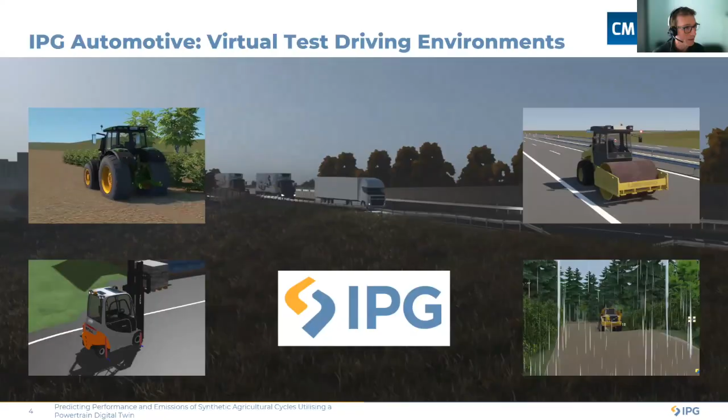So the background to the project: what we wanted to do was to take an existing digital toolchain, one that was developed by HORIBA Intelligent. The methodology of this toolchain is to create an empirical digital twin. So what essentially happens is you take an engine in a test bed, you create a digital model, a digital representation of that engine. You then take it into a virtual environment and you test it against representative load cases

from that virtual environment. Because this is the case, there's no limit to the number of variables that you can explore. And this means that you can test not just one or two representative load cases, but an enormous number of sample test cases. And the concept is that with this approach, those engineering teams are able to test a very large number, identify those hotspots, those load steps, those test cases in which the engine is going to produce a very high emission state.

The concept then is, having identified these hotspots, as we call them, you return to the test bed, you run the tests in the test bed, confirm that your predictions are correct, and then you move forward and develop your way to a solution. So that's a proven approach with respect to on-highway applications.

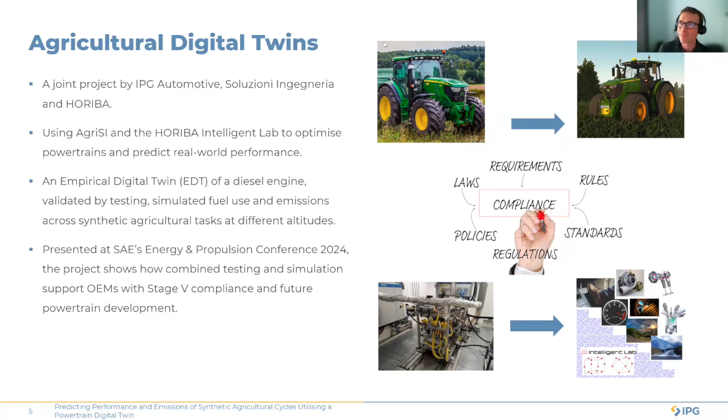I work in Soluzioni Ingegneria, an Italian company that is partner of IPG Automotive. Today we go directly to the same presentation we did in SAE last year, the prediction of performances and emissions for synthetic agricultural cycles utilizing a powertrain empirical digital twin. So just an introduction, you will have two halves of this presentation. One belongs to AgriSI, our side.

It is a software able to simulate vehicle dynamics during off-highway operations. And we worked together with MIRA to exploit AgriSI to obtain reliable data to feed the HORIBA MIRA powertrain model to evaluate fuel consumption and emissions. So I will take this first part, exploiting the simulations in precise agricultural scenarios and providing engine speed and engine torque to MIRA.

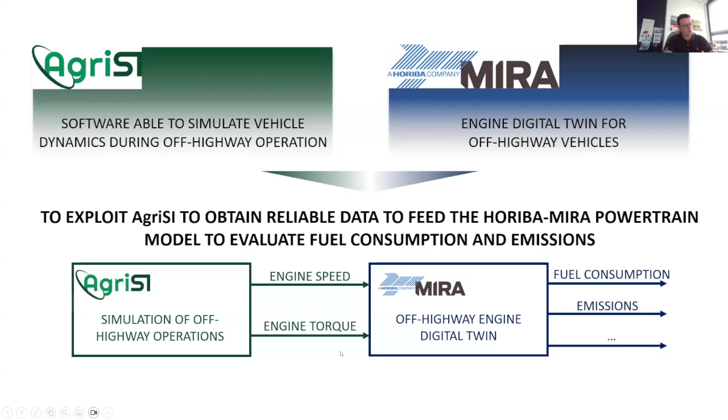Agricultural vehicle dynamics and precision farming simulation platforms, co-simulation with IPG CarMaker and TruckMaker. So I will pass in my index through what AgriSI is, some main features of AgriSI for a better understanding of the capabilities, and data extraction for the digital twin of the engine. So when we work with the tractor and implements, starting from the implements, in our software we model mass, inertia, geometry, suspensions, tire over plastic soils, operating limits, movement, kinematics in case the implements make some transformation during operations.

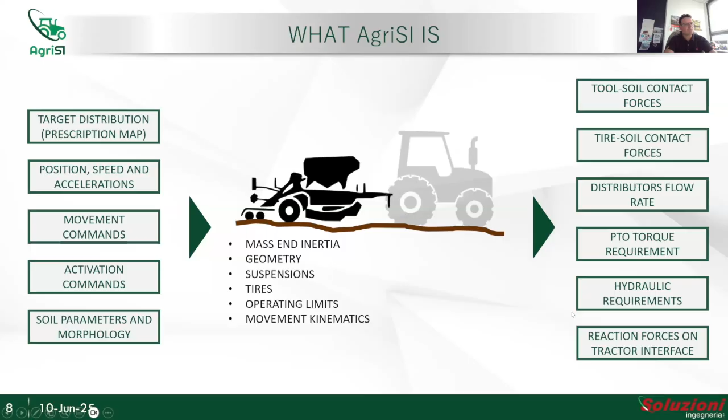So to feed the implement model, we can use a prescription map, that means the target distributions or operations, georeferenced, position, speed, accelerations, movement commands, activation commands, and soil parameters and morphology. The implements model will provide tool-soil contact forces, tire-soil contact forces, distribution flow rate, PTO torque demand, hydraulic requirements, reaction forces on tractor interface.

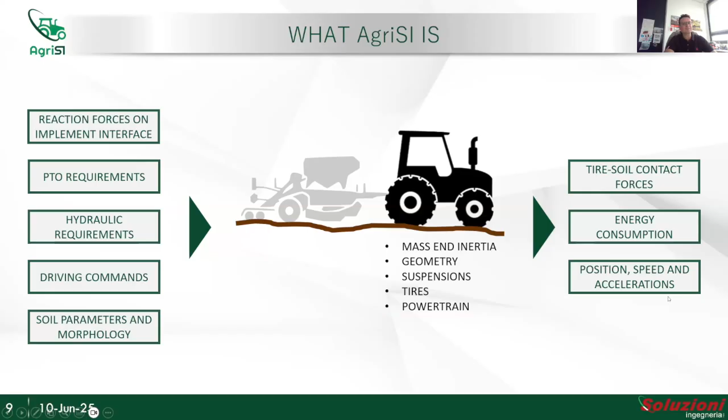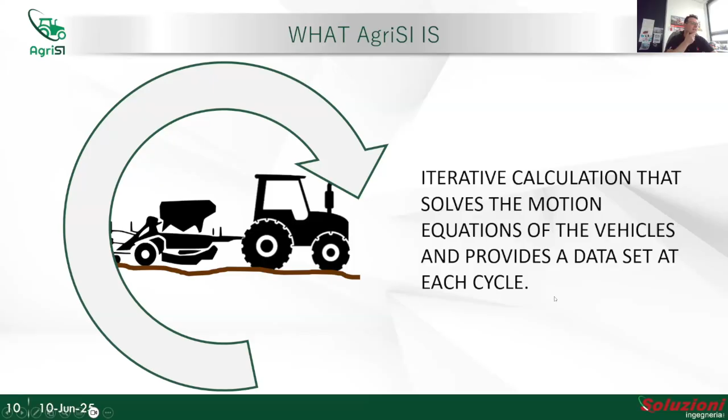So as we reach the tractor, again, we can fully parameterize mass, inertia, geometry, suspensions, tire, powertrain. The tractor will handle reaction forces on implement interfaces, PTO demands, hydraulic requirements, driving commands, soil parameters and morphology, and results in tire-soil contact forces, energy consumption, position, speed, and acceleration. So this flows in an iterative calculation that solves the motion equations of the vehicles and provides a data set at each cycle. So let's see a little bit more in detail.

So when speaking about the tractor, we can build a tractor model starting from experimental or multi-body models if already existing, for example, MSC Adams, through a converter that is quite rapid in developing real-time models. The powertrain can be either ICE or electric and hybrid with dedicated gearbox and driveline models. Simulations of dangerous and critical maneuvers, for example, overturning. I would also say in-field without accounting for seasons, so we have the possibility to simulate every period of the year. Tire model calibration accounting for plastic soil.

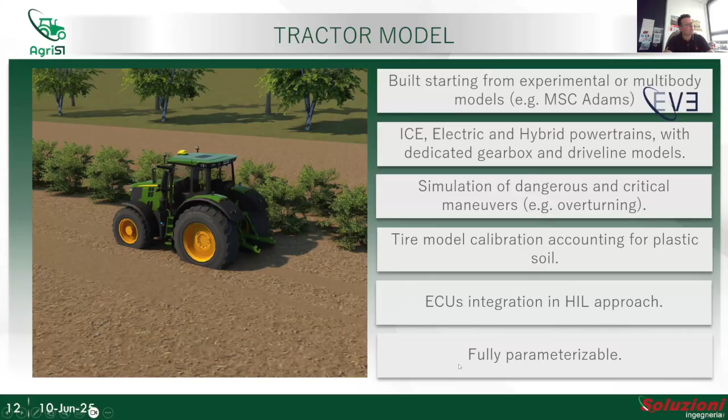And, as Stephen said before, when we arrive to have some hardware already available, we can jump to a hardware-in-the-loop approach. That means having some real components, real ECUs integrated in the loop of simulations. All the architecture is fully parameterizable. You see just an example for on-road scenarios where we see a tractor with a trailer in the back where the payload can be changed accordingly.

Speaking about tire and plastic soils, these are quite relevant to the scope, and the tire model has been built starting from experimental data, through which we instrumented full tractors with dyno hubs, having longitudinal and lateral tire slip and force and moment in the wheel hub. Out of the observation of the experimental results, we were able to fit the numerical model in order to respect the experimental evidence.

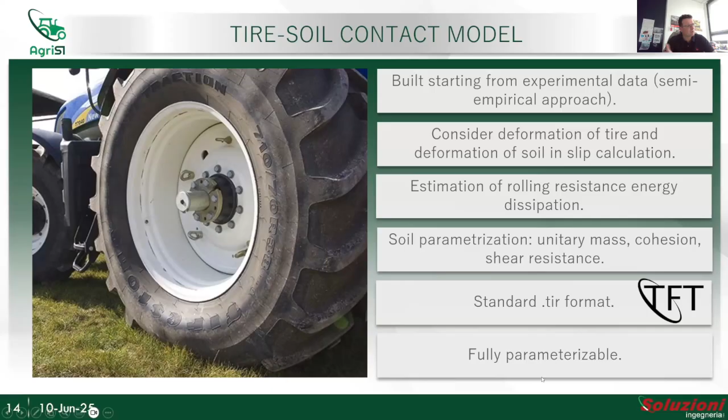This also, of course, considers the deformation of tire and soil in slip calculation and rolling resistances for power loss and energy dissipation. The soil parameterization comes through unitary mass, cohesion properties, and shear resistance. At the end, all this information is used to populate the standard TIR format because we want to guarantee the real-time capability of the software platform. Again, the tire can be fully parameterized according to tire geometry and soil properties.

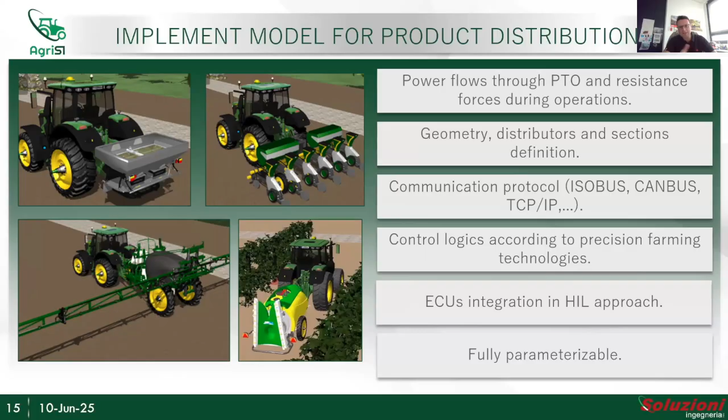When reaching the implements, we have all the power flow through the power takeoff and resistance forces during operations. For example, for the seeding machines, all the resultant reactions under the blades, or thinking about soil tillage, as we will see shortly. The communication protocol between implements and tractor includes most of the standards: ISOBUS, CAN bus, or TCP/IP. Control logic of the implements according to precision farming technologies. Again, when the implement is ready, at least with some of the hardware, we can place the full hardware in the loop and feed the I/O of the implements through real-time simulations.

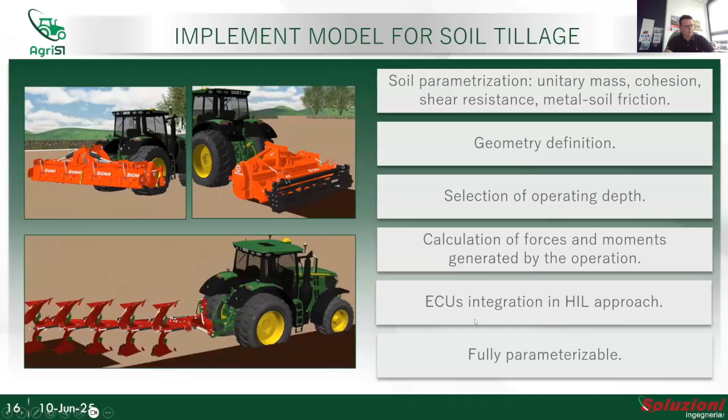Before we mentioned soil tillage, so you saw before seeders, sprayers, fertilizers, but we also have soil tillage machines. So again, we have the possibility to implement soil parameterization with all the connection to soil, geometry definition, selection of operational depth, calculation of the forces and moments generated during the operation, and the possibility to run HIL.

In this video, you see the plow at different depths generating resistance forces on the tractor. The plow itself can be lifted up, and all the inertia of the implement is taken into account during simulations, according to the final position of the implement. So you see the huge pitch inertia given by the plow.

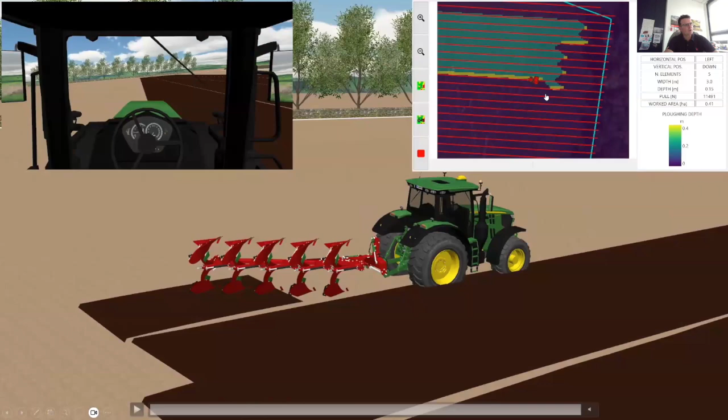The same can be reconfigured on each side, so we can flip the implement side by side and restart the operation. There is also soil manipulation, such as the furrow given by the previous passages. As soon as the blades operate, we monitor what's going on in terms of where we are, the trajectory we are following, the previous furrow, if it is filled, and the new furrow carried.

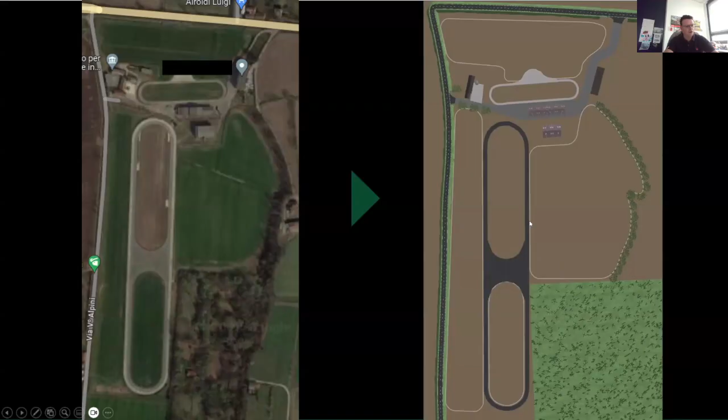Scenario: we need a georeferenced scenario. We can import any field in the world, starting from a shape file with the field boundaries, real shape and morphology, with the possibility to add edge situations such as environmental situations or obstacles, vulnerable presences in the field such as animals or operators, customize and perform beautifications, and try to achieve at the very end the digital twin of a farm with buildings, different farms, fields with different soil properties, etc.

Control logics, GPS-based, meaning georeferenced within the field. This means we needed to simulate the georeferencing of the tractor within the field with latitude and longitude, prescription map importing, and product distribution control. So where the tractor is, it needs to know the target flow rate that has to be accomplished in that section. Optimal trajectory importing and generation algorithms, GPS-based longitudinal and lateral vehicle control, the CEP for GPS noise injection, and again, as soon as ready, run HIL of any of the components.

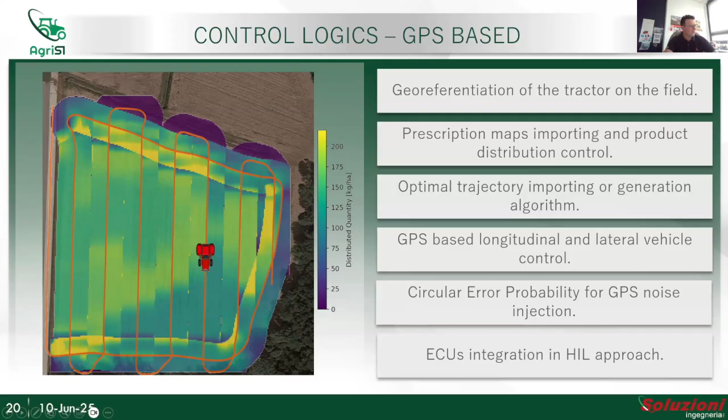You see an example of a real field. This is a typical prescription map giving the kilograms per hectare in the different sections of the field. The tractor is running over a given trajectory. Thanks to GPS, it knows where it is, and we just covered the green zones, and previously a yellow one.

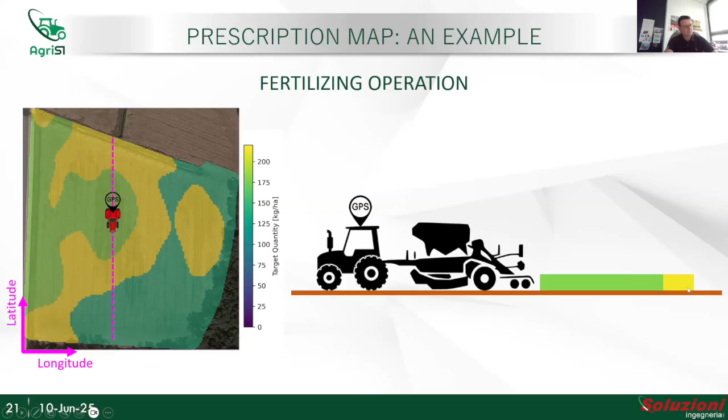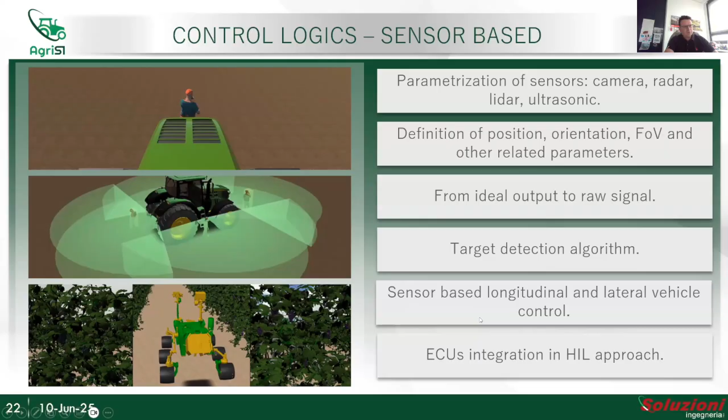Again, control logics can also be sensor-based with some sensor fusion, because, for example, we need to look at the surroundings occupied by a vulnerable user, or better understand orchard or vineyard plants, whatever. So camera, radar, LiDAR, ultrasonic, definition of position, orientation, field of view, and other related parameters, from ideal outputs to raw signals, target detection algorithms, sensor-based longitudinal and lateral vehicle control for slip analysis, and again, HIL.

So let's see some data extraction that has been done for MIRA. The target was to achieve engine and torque demands, and we ran over different scenarios, for example, fertilizing, comparing soft and compact soil, spraying, flat and hill, plow, effect of depth, seeding with PTO and soil tillage, crop transportation also on public road. I won't go all along the matrices, but just to see a few examples for the fertilizing, understanding the differences between compact and soft soil.

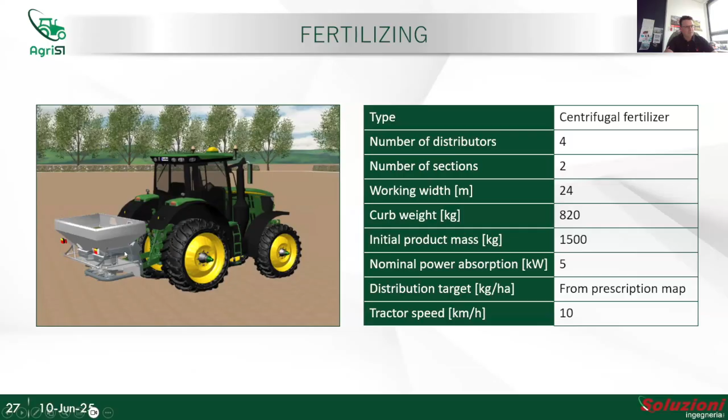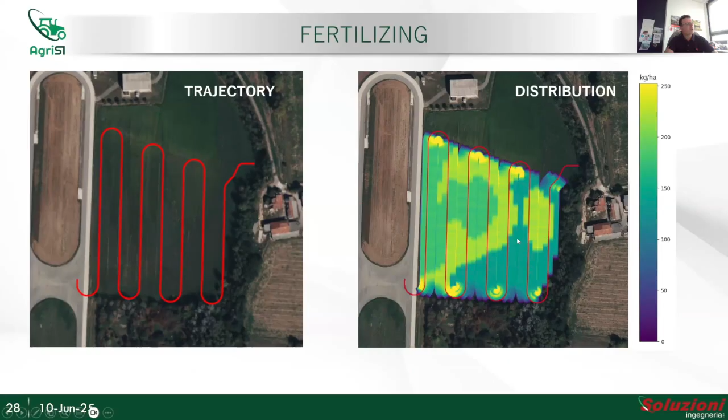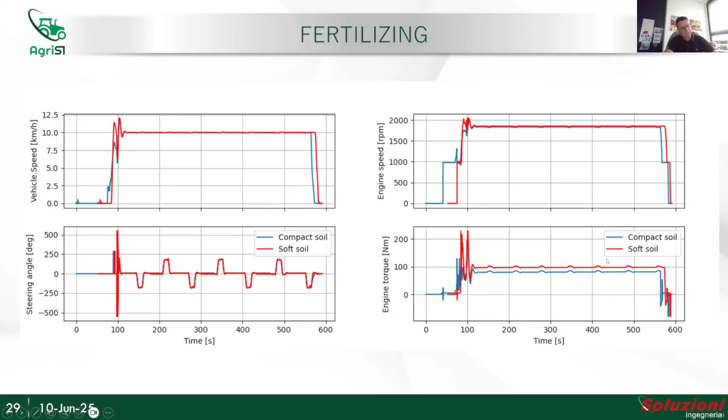The fertilizing is demanding PTO mostly, so this is the convoy, tractor, and lumped suspended fertilizer with some parameters on the side. And out of a trajectory, we were interested to accomplish a mission of prescriptions. So this is the results of what has been done. And the comparison by means of time histories: vehicle speed that is mostly the same, with the blue compact soil and the red soft soil. The steering angle also is mostly maintained the same, RPM of the engine, that is the target of the controller. But at the very end, you see finally some differences in terms of engine torque demand, Newton meter, over compact and soft soil. Those will be the inputs to MIRA.

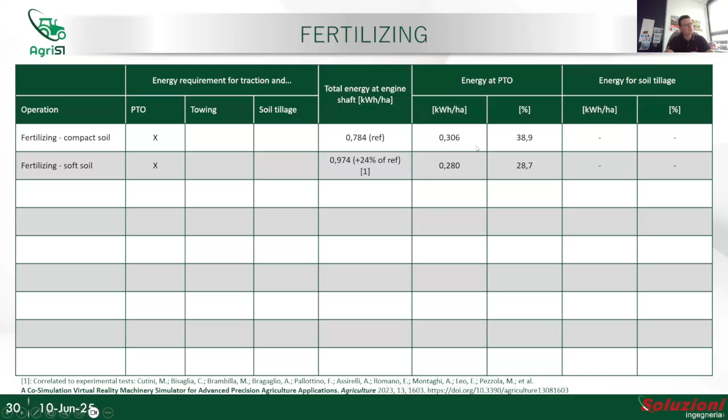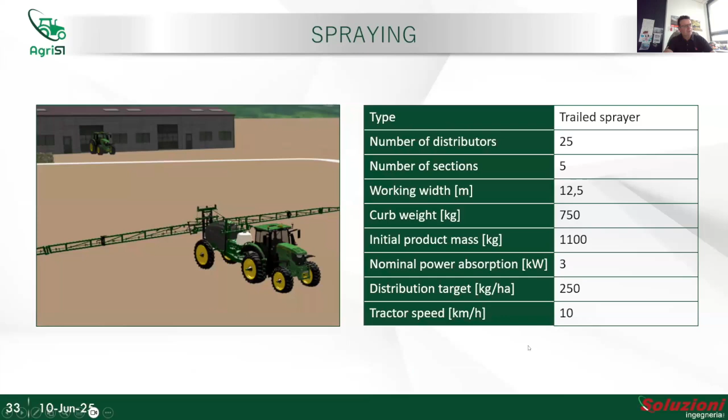So here, briefly, with some good references published on agriculture, you can see what the energy per hectare was, total energy, and the split between PTO demands for the fertilizing operations and the percentage over the overall energy. So spraying, I would see the second example with flat and hill. The spraying is also making some towing, that means there is a semi-trailer in addition to the PTO. This is what we are observing, and the corresponding parameters on the side. Now we are working with constant rate over all the field.

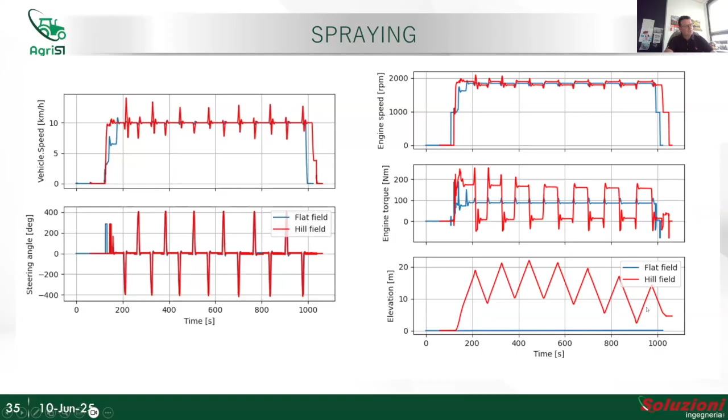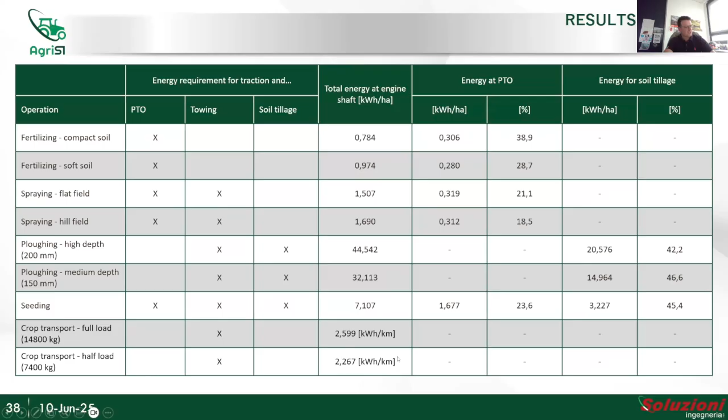And again, we can observe time histories by differences. Again, same speed, same steering angle, same engine speed, but now we have different engine torque, because of the demands when running uphill or downhill accordingly. You see the elevation in the very bottom. Again, final energy normalized over work surfaces, and the corresponding percentage. We will go through all, and at the very end, we have just a map that is just numbers at the moment, but you can have, I guess, the presentation to better have a look inside in terms of all the operations done, also the plow that is very demanding, and the road expressed in kilowatt hour per kilometer run.

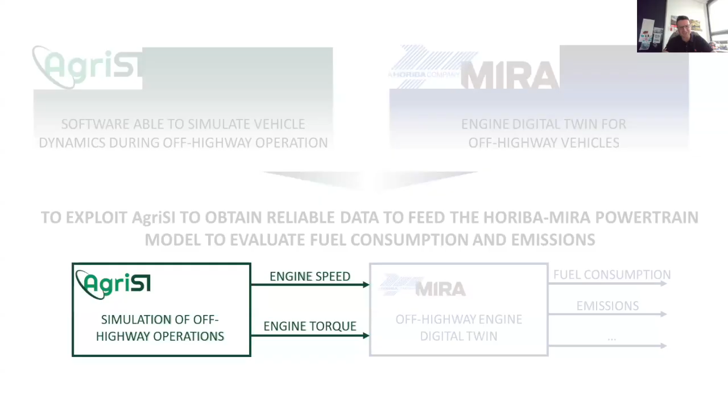Thank you. Okay, so yeah, my name's Steve Whelan. I lead a global application center here at HORIBA MIRA for HORIBA, our parent company. For those of you who don't know, HORIBA is a multinational Japanese company making measurement instruments, specializing in accurate measurement of all sorts of things. My association with it for most of my career has been measuring vehicle emissions and engine emissions. And at MIRA, we've been developing vehicles and powertrain since 1948. So there's quite a lot of expertise here.

So without dwelling on the point too much, what we're bringing to the party is our application in powertrain and vehicle development. And what I've been doing with my team for the past 5 to 6 years is developing new applications to streamline the development process. And for that time, we've been working hand in hand with IPG, who've been providing the basis for the vehicle and machine simulation software. We've been developing methodologies like digital twinning of powertrain to enable faster development cycles and get to powertrain calibration a lot quicker. We originally started this work looking at real driving emissions in the light duty sector, which was a big change for the industry when Euro 6 came along. That's why we started doing this work.

So for some of you who may be involved in simulation, this is not a physics-based model. We're not calculating the NOx, or the efficiency of the engine. We are literally interpolating a neural network that knows how the system responds if we change the load and the speed of the engine, or the temperature or the altitude. This is what the result is, and you teach the neural network by setting up a structured test, which I'll talk to you about in a minute.

So why are we doing it? This is illustrating what I said earlier. Graphically, today, stage 5, we have to do a certain amount of physical tests and in-service monitoring. Going forward to stage 6, if we rolled our methodologies forward, we'd have to do maybe twice as many tests or more, and much more in-service monitoring, to be absolutely confident that the vehicle or the machine, the engine, would remain compliant with in-service testing. So what we're proposing is to use a simulation approach where we can cut down on the amount of testing and overall cut down on the amount of effort.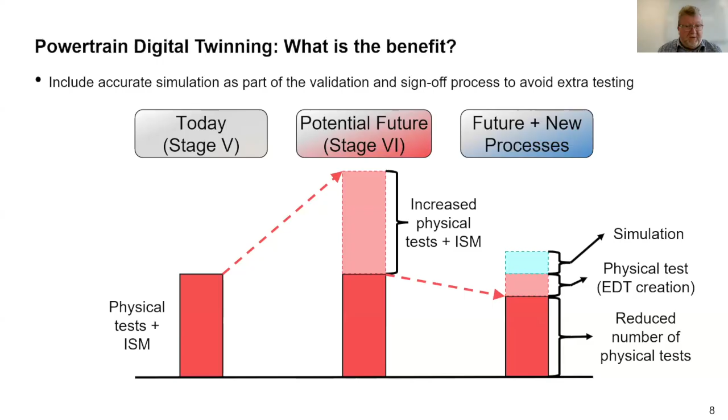So the bill for the bar chart on the right hand side is a lot lower than the bill for the middle bit, and we get more scenarios. Stephen mentioned this at the start: because it's in the virtual domain, we can run thousands of scenarios instead of physical tests where we just don't have enough time to run all those tests. So this gives you a faster and lower cost process, because you don't have to pay for so many physical prototypes or do so many physical tests, but you get significantly more data, so the level of confidence can be higher. But you've obviously got to validate your models. That goes without saying, and we certainly do that.

So the digital twin toolset: as I mentioned, the start of it comes in test design. We have to teach the neural network. So we design a transient cycle, and it's got to be transient because of the NOx emission that will come from an engine. Nothing is steady state these days; a lot of the NOx comes from transients, going from one condition to another condition. The history is very important, and that dictates the NOx production. So you need to have a transient cycle.

So we design a transient test based on how we understand the powertrain will operate in its theatre of application. That's a crucial part of the process. Then we run the tests. We then take the output of those tests and put that into our modeler, which effectively trains a neural network based on all the inputs and all the outputs.

And as I said, it is empirical, so it's based on measurement. There are no physics-based predictions in this. Once we've trained the model, we can run the model against measured cycles or virtual cycles, and then we can run those on the engine, and then we can look at predicted versus real emissions, and we can validate the digital twin.

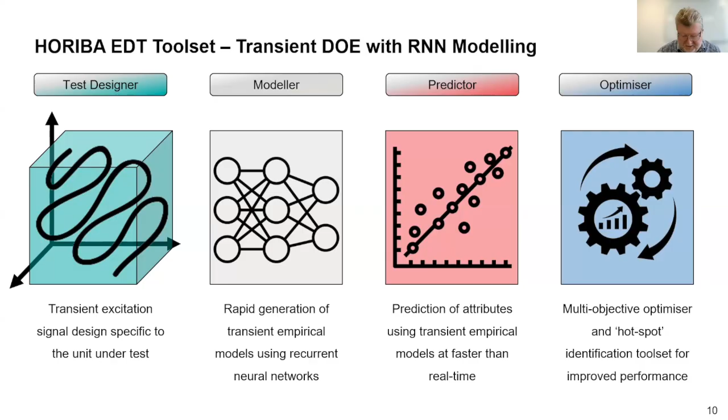And then as a further step, which is the step we're working on now, which I'm not going to be presenting in this presentation, but we have an auto optimizer that we've been developing with Loughborough University, where this will enable the powertrain calibration to effectively optimize itself, given the constraints. Maybe you want the lowest NOx for best fuel consumption, and this will give you a calibration in hours, not weeks or months. So that's going to be quite revolutionary when we do that.

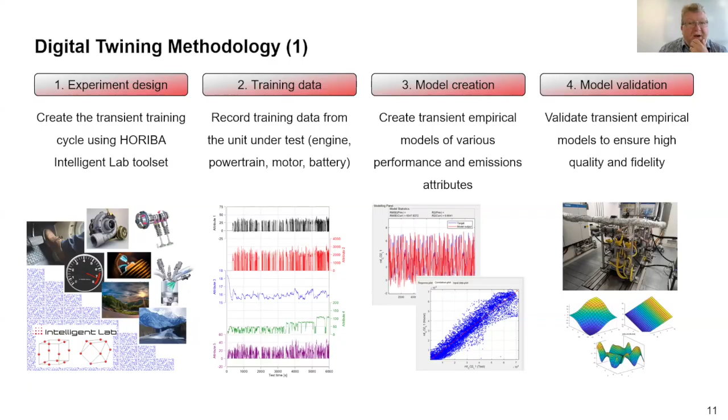So the way we step through the methodology, we've got the experiment design where we need to understand the application. We develop that cycle, we run that cycle, we produce all the training data, we create the model, we then validate that model, then we move on to combining that with virtual or real scenarios. So as we found with working with many non-road OEMs, these guys have got many real world scenarios recorded already.

So in a lot of cases, we can study real world data logs and get predictions from those at different weather conditions, or as we're going to report today, we can generate those scenarios virtually, which obviously gives us the advantage of being able to generate thousands of scenarios, because we can run all this much faster than real time. Then we can predict responses. We can look at those as heat maps. We can look at those as graphs. We can look at those however we like, and we can identify these.

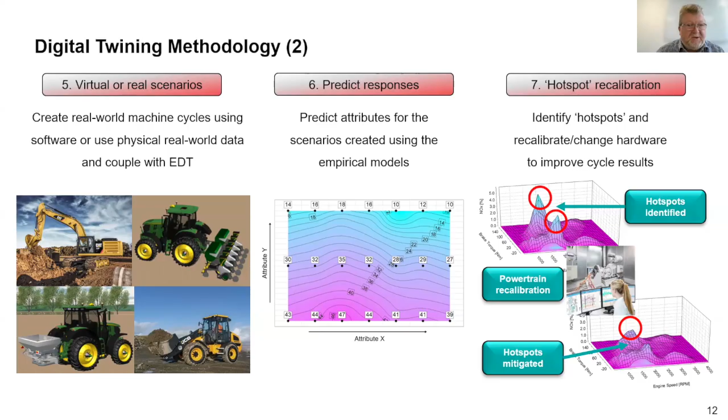In this case, when you're developing a calibration, you can very rapidly look at what we call hotspots, areas of a calibration that exceed the desired level of emissions or fuel consumption, etc. And then we can very rapidly focus in on those areas and eliminate them, and produce a calibration much faster and far more robustly than the traditional approach.

In this case, we've made several digital twins of several non-road engines. And in the case of a non-road engine, it generally gets used everywhere, because it gets used in all manner of different applications. So in this case, we developed a very comprehensive transient training cycle.

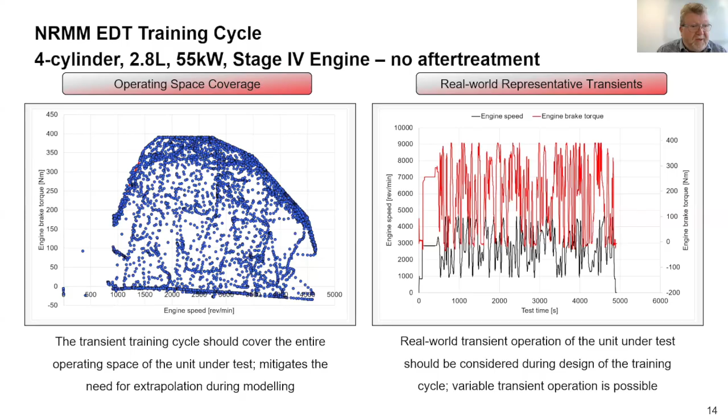So here, this provides all the data that relates all the inputs, predominantly load and speed, but we also stir in things like ambient temperature, and we can also change the ambient pressure on our test facilities here at MIRA using a piece of HORIBA equipment called MEDAS that changes pressure and temperature and humidity, so we can simulate altitude operation and build that into the digital twin as well. So that's the overall approach to generating the data.

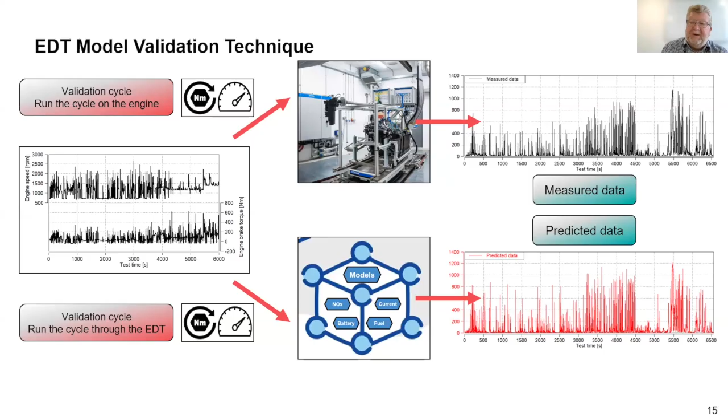We then create the model, and then we take a token sample of data. So we take a cycle. We then run the digital twin across that cycle. We also run that cycle on the test bed, and we produce a result. In this case, I think this is NOx, but we run the cycles, we get the answers from the test bed, so what the engine produces in reality, and then we also predict it using the digital twin, which is the bottom chart, and then we can compare the two.

And in this case, you can see the black line is measured data. The red line is predicted data, and you can probably just about see a little bit of black line peeking through. So basically, in this case, the data overlays. When we look at this on a cumulative chart, you can see this data overlaying. So this is a very rapid validation. Sometimes it doesn't validate, in which case you go back to redesigning the coverage of the training cycle and repeat.

The training cycle, as you can see, in this case is a few hours. So it doesn't take very long. So within a day, you can run a test and you can build a model and you can validate it. And then in a few days, you can iterate and get a very, very accurate model.

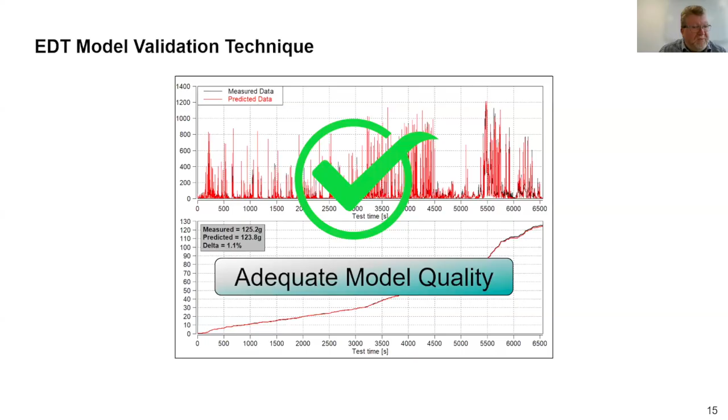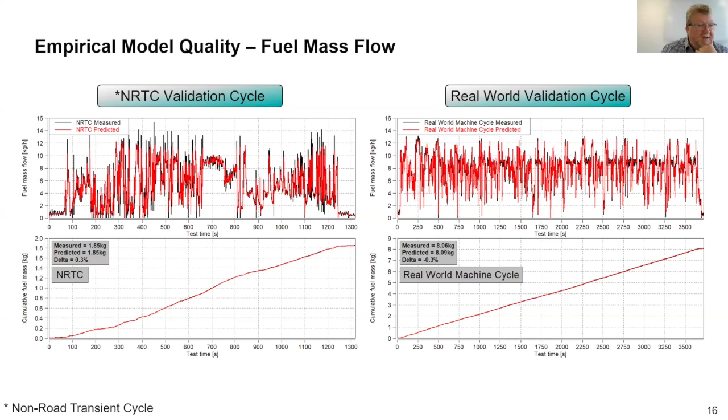And in this case, we can see fuel flow. So again, very, very accurate prediction of fuel flow. We've then got CO2, which again should follow fuel flow, and indeed it does. But again, we're within 1% of predicting CO2 on the non-road cycle and the real-world machine cycle. So if you're looking at your carbon emission from your agricultural equipment, this is going to give you very, very accurate predictions.

Then we've looked at NOx. In the industry, NOx is painfully difficult to predict from any type of simulation. The empirical digital twin gives you a very, very accurate model of NOx within 5%. Sometimes we're even lower. So the real world cycle here is within about 1% from the measured data. So this is extremely good for a NOx model.

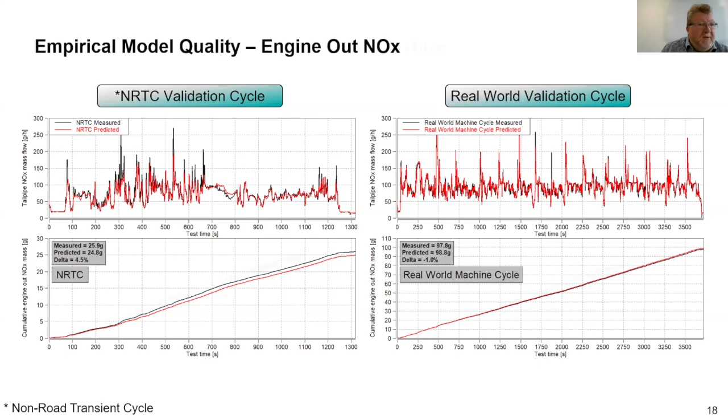And then obviously exhaust temperature here, we can predict exhaust temperature. Also along with this, we can get airflow. So if you've got the gas flow and exhaust temperature, you've got exhaust enthalpy. So if you're developing after treatment systems for your engine, this is exactly the sort of data that you can share with your after treatment system provider and develop the optimum after treatment system to reduce tailpipe emissions.

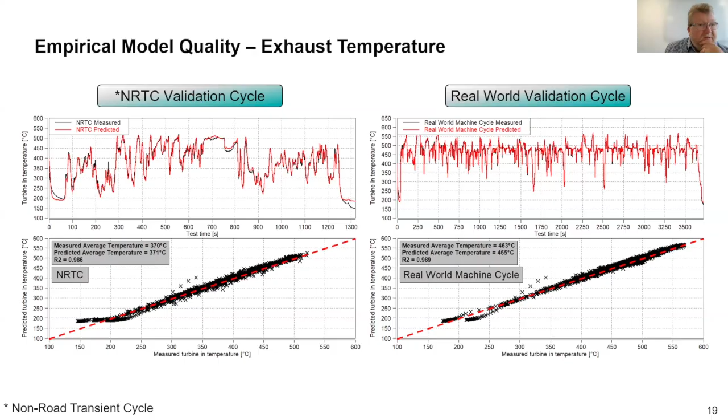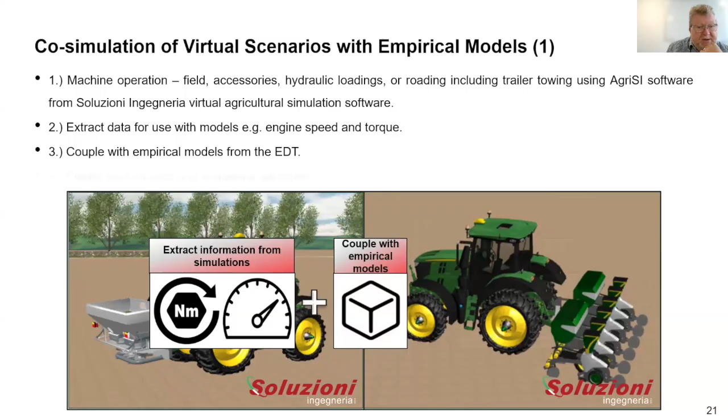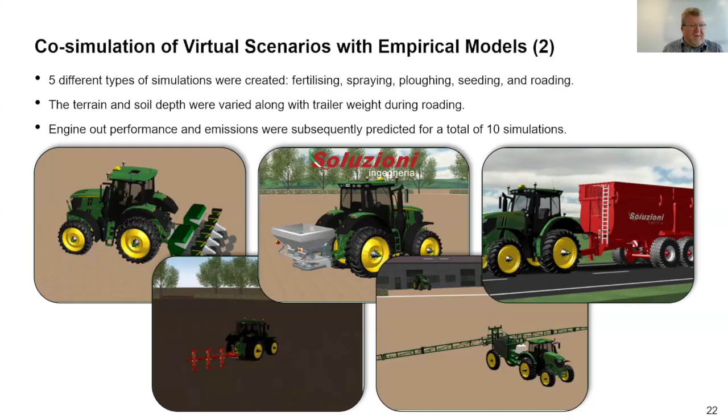So again, I'll be repeating some of the stuff that Marco showed, but together we looked at the tractor simulation, which provided engine speed and torque as an input. We combined those with the digital twin, and we produced predicted responses. So these are the five scenarios we looked at. I won't go over them again. And we effectively produced these. I'll get the little videos running.

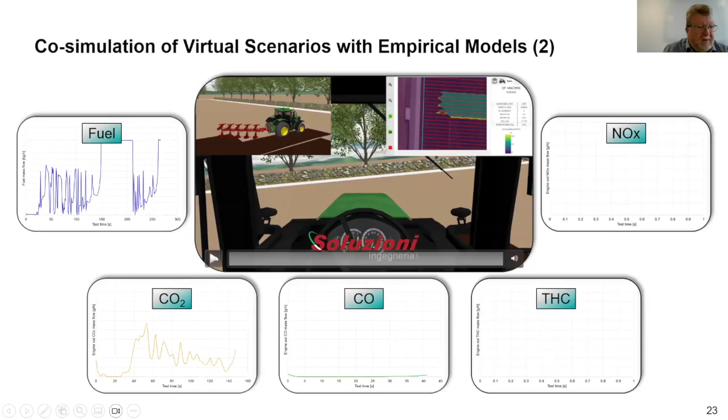This just gives you a representation. So while the simulation of the tractor is running, you can see. This is a repeat of what Marco showed you in real time, or in fact faster than real time. We're just slowing it down for you humans out there. We get real fuel consumption, CO2, CO, total hydrocarbons, and NOx predictions from this.

So if you want to estimate what's happening in the real world, if you want to be confident that your powertrain calibration is suitable for a multitude of agricultural operations that could get monitored by the regulators at stage 6, this is the tool that will help you do that without spending months or years in the field with a high number of different applications running. And as Steve mentioned earlier, this can all be done very early in the product development process as well, once you have a first prototype powertrain that you can start to get some real data from.

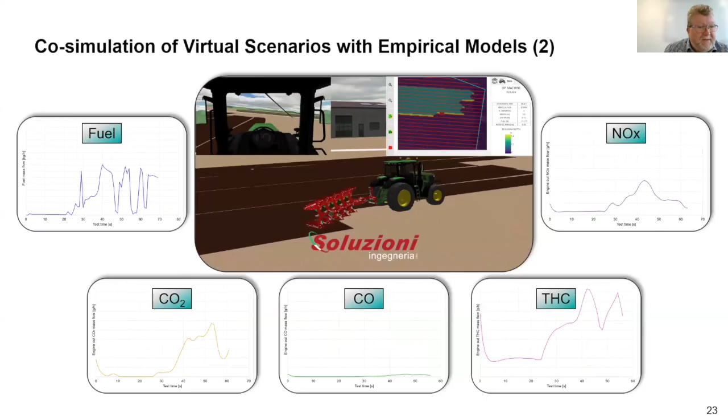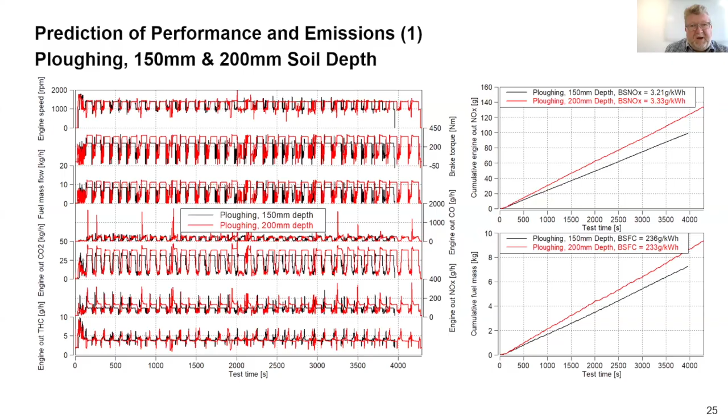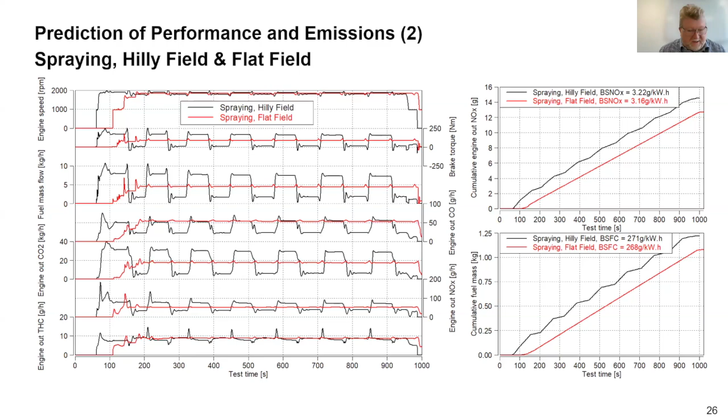So very quickly you can use this analysis to look at all the different applications that the machine will be running on, spot any particular issues, and see directly in the data where your problems are. You can then go back, change the calibration, rerun the digital twin, rerun the simulation, and see if you eliminate the problem. So once you can measure it, you can fix it. This gives you the ability to do all this very, very quickly at the comfort of your own desk.

So the last one here is about the trailer weight. This is running a road trailer, empty, half full, and full. Obviously, we all know that a full trailer is going to use more fuel and create more NOx, but this gives you the numbers and effectively the quantitative differences between those scenarios.

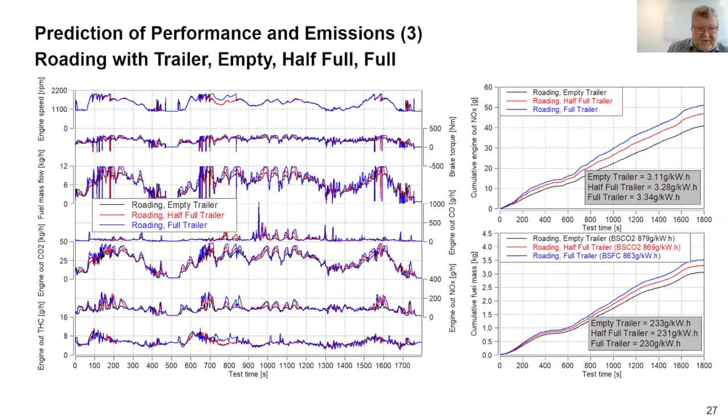And again, if you look at this data in a different way, so this is using heat maps, and if you're interested in, from a powertrain point of view, where are my problems in my calibration, this shows you the hotspots. So you want to focus your time in improving the calibration in these particular areas for this particular application. It also illustrates high residence times for a particular scenario as well.

So it helps you focus rather than try and solve problems over the entire load and speed range. It also enables you to optimize fuel economy a lot more effectively when you know which areas to focus in on NOx, and you can then optimize fuel economy in other areas.

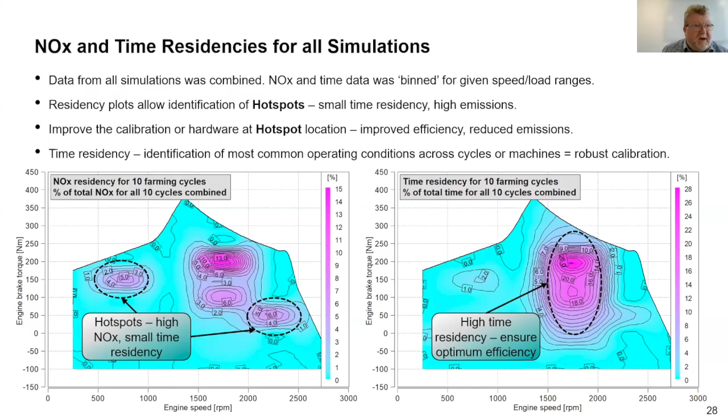So all in all, when you have a digital twin, particularly in non-road, where we've just shown the multitude of scenarios of applications on one particular type of non-road mobile machinery, but we know that one engine goes into several, maybe hundreds of different non-road machinery examples, the power of this means you can check or even help you develop one calibration fits all. At least have that understanding, or if you have to modify a calibration for a particular application.

If you're an OEM that makes equipment, that helps you interact more, or if you're an OEM that just makes engines and sells them to people that make equipment, you can also double check very quickly that your engine is going to be compliant in the field on a particular machine, because you can work with your customers and they could supply you with models of their machines, and you can use your own digital twin.

Having developed this originally for passenger car RDE regulations, we believe this is far more powerful as a methodology in non-road, because the key is you can very rapidly generate a very accurate digital twin of one engine, and that goes in many applications, which is not quite the same for passenger car, where you do have powertrain sharing, but nowhere near the sort of extent you have it in non-road.

So that's it, really. I won't read through my conclusions. Basically, I've said that all along. It helps reduce time, reduce cost, and improve confidence. And there's a reference at the bottom of the slide there for the SAE paper. So if you are a member of SAE, you can get onto the website and you can download a copy of the detailed technical paper for a reasonable fee.

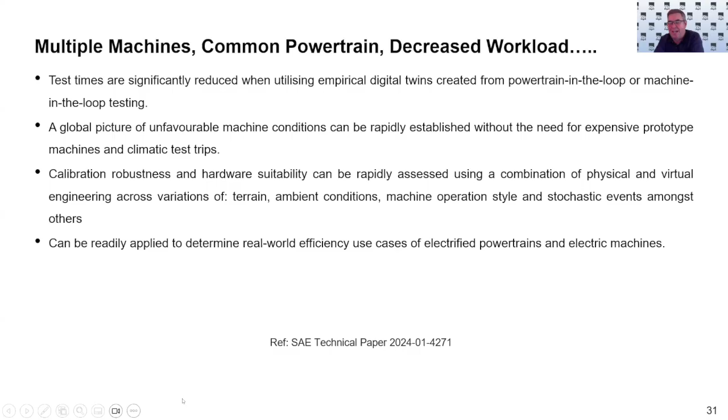Okay, thanks, Steve. What you finished on was the question I was about to type in, actually. There's a lot of agricultural machinery manufacturers who buy in engines, and the machine manufacturer doesn't have the expertise, so they buy the powertrain in often, a hydrostatic transmission like a sprayer or something like that, where they'll buy an engine in and fit it into a hydrostatic transmission. So you can see that being a really useful service for those types of people.

Because I guess if you're a machinery manufacturer buying the engine, you're very limited in what you can actually do with that engine in terms of its calibration. Yes. Depending on the size of the customer, I guess. I'm not involved in the commercial side of non-road, but ideally, if you're the engine OEM, you really only want to have one calibration. You want to do one development project.

Up to now, you can say this engine meets stage 5 because you run the non-road transient test, you run the steady state test. If it's going to be a generator, you run the generator cycle test, and they're all reasonably consistent, certainly in the West between the Euro and the US. They are different, but not vastly different. So you can certify the engine, tick the box, and that's it. There was no in-service compliance.